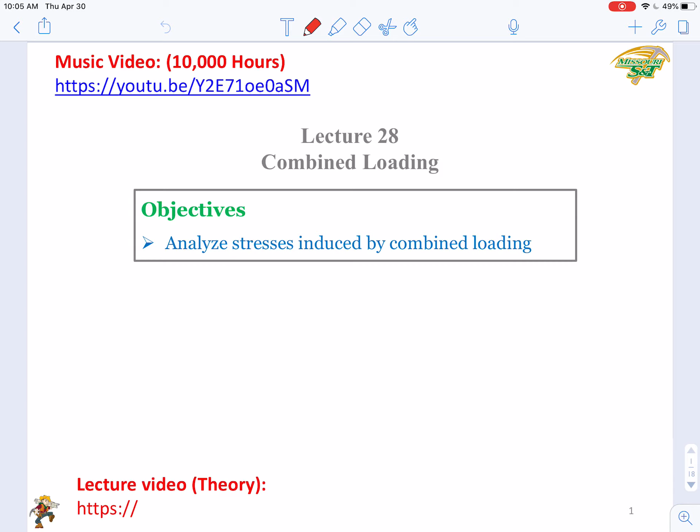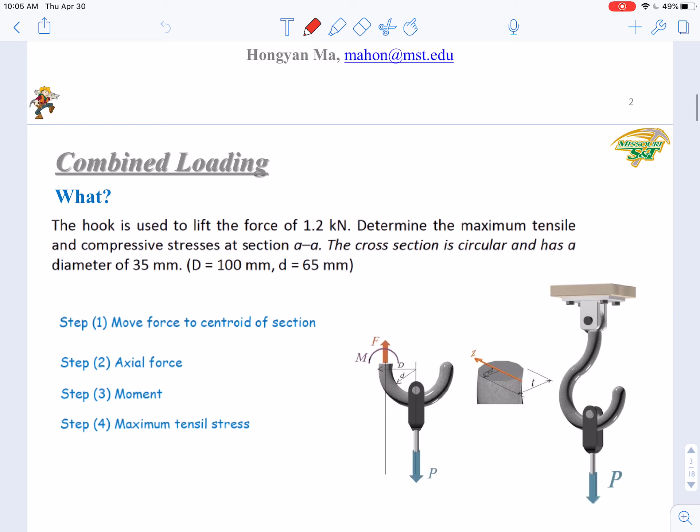That will be our chapter 10, combined loading. We will have several examples today, and I will leave a couple more examples to next Tuesday, to give more details in that class, so that you can be better prepared for exam number 4. Let's start from a simple example.

Okay, so here is a hook. This hook is used to lift a force of 1.2 kilonewton. Determine the maximum tensile and compressive stresses at section AA. The section AA is just somewhere here. The cross section is circular and has a diameter of 35 millimeter. So you're requested to determine the tensile and compressive stresses at the section.

This hook looks like a simple structure since you have only one P applied on it, but it's not that simple. If you're analyzing this cross section, this P will have an arm to the local centroid of this cross section. The cross section is a circle, so the local centroid will be in the center, right? So from the location of P to the center, you will have an arm A. So this P will make a bending moment on that cross section.

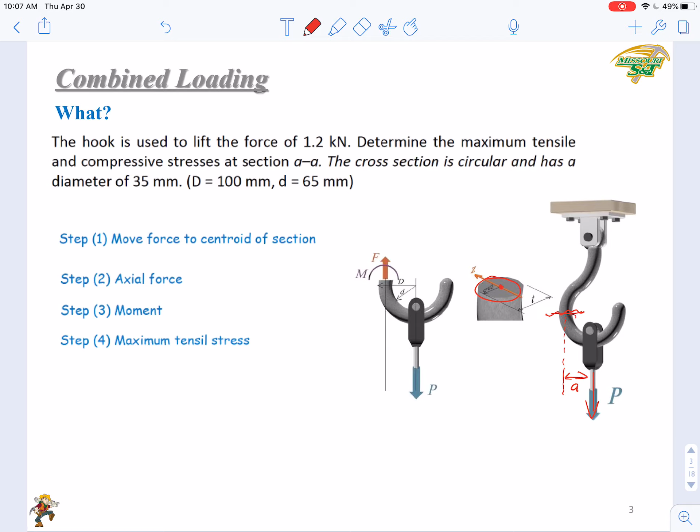So this is a basic example, a simple example to show you what we mean. What is combined loading? So you can see that generally we can solve stresses caused by combined loading in several steps.

So in the first step, you always need to find out all external forces and move them to the centroid of the cut section. If you have an external bending moment, you just move this moment directly there, so this will not induce any extra moment. If you have a force parallel to the axis of the cross section, then you will have an extra bending moment, M equals F times a.

Here is the example. If you have F there, and you are calculating the stresses on the cross section as shown here, you need to move this F. This is parallel to the axis, right? Just move this F to here, so P equals F. But since you have an arm a, this will generate an extra bending moment M equals Fa.

If you have a force perpendicular to its axis, this will generate a shear force as well as a bending moment. I believe you all know how to calculate this kind of bending moment. It's just like in cantilever or simply supported beams, how to calculate the value of bending moment based on vertical loadings, so Ay, By, Cy, etc. That is a basic thing.

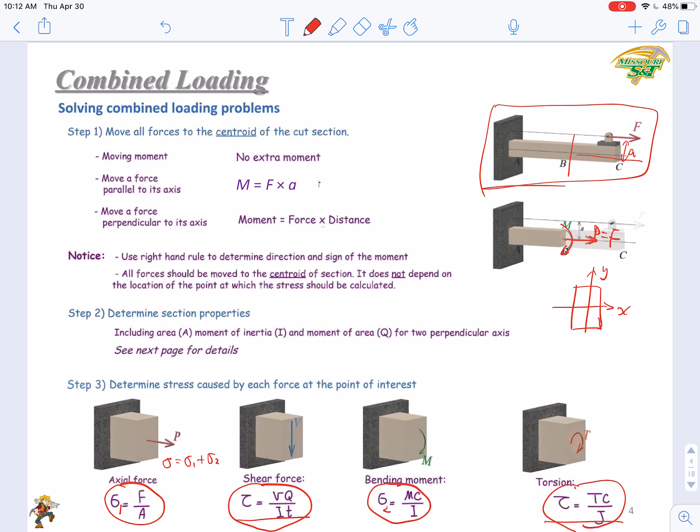As I said, sometimes a rectangular cross section may be subjected to two perpendicular bending moments. So you need to be careful in selecting Ix and Iy, the moments of inertia with respect to the x and y axes. We had a lot of exercises in identifying the correct sizes to calculate I, in which cases you use bh cubed over 12, and in which cases hb cubed over 12. You should be familiar with those.

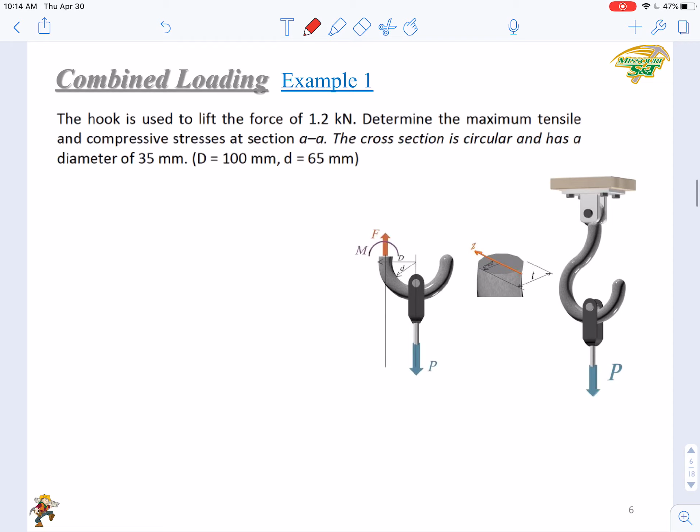Then we will give several examples regarding combined loading induced stresses. We will start from a simple one, then give harder and harder examples.